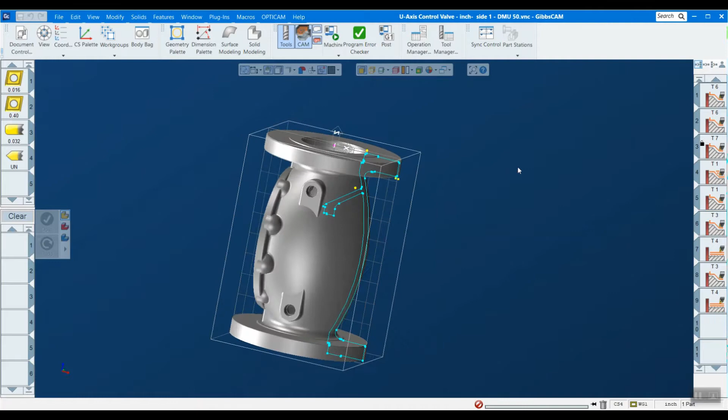a mill. So if you have some kind of roundish part like this, you don't have to do the entire part, obviously, so we're actually just going to be turning this top part here and the ID and adding some threads and stuff in there, but freeing up a lathe or guaranteeing concentricity are the two main benefits that I've seen.

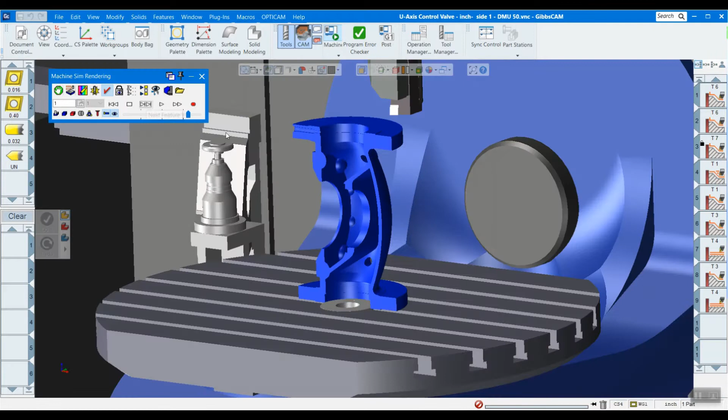So without further ado, I'm going to begin here by jumping into a machine simulation, and I have a nice DMU 50, I believe. I've cut the stock in half so that we can see the ID and OD at the same time. But before I begin, I just kind of want to point out this U-axis tooling here.

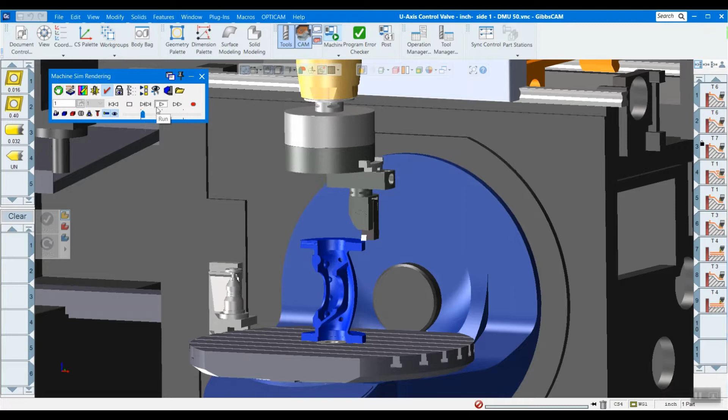So this is all modeled. The cylinder part here was modeled by me per specifications, and then the U-axis head down here was actually got from the manufacturer's website, and then we just put in some standard insert holders into this contraption here, and that's how you set that all up. I'll be going over that in more detail in a minute, but I just want to start off by playing it somewhat slow so you can see how this operates.

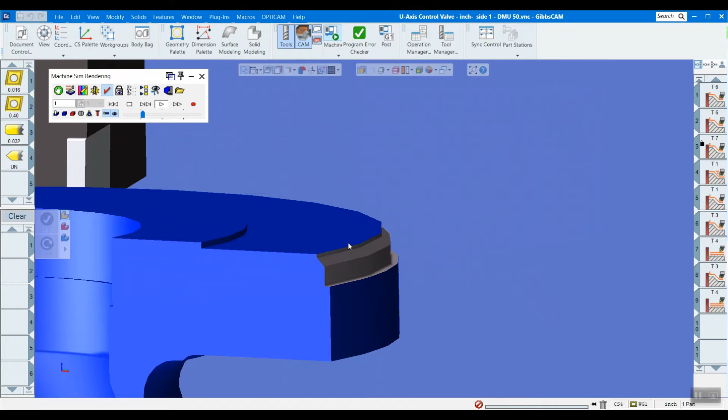Now, it's hard to tell from this toolpath, but the U-axis can actually dynamically decrease the radius that it's milling at. So we actually have a chamfer here, and it slowly increased the U-axis so that we could get a nice little chamfer here. And we'll also be doing the same concept here on the bottom to get an undercut. So I'm going to speed this up.

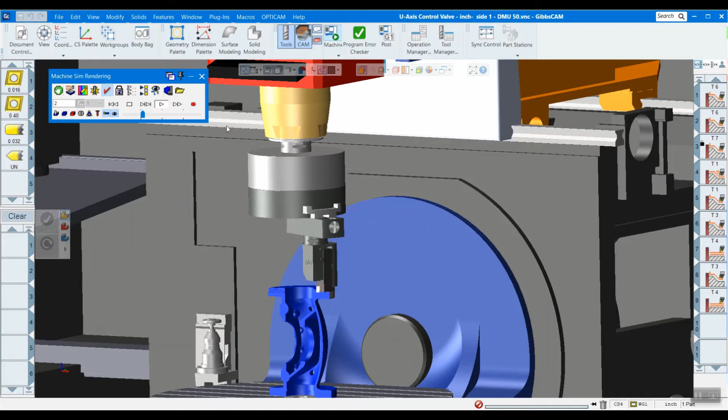Now, one thing to notice is that it looks kind of weird. I feel like you would be getting a lot of wobbling in real life with this, and there's actually not modeled here a counterweight so that you can actually go at really high RPMs, so don't worry if it looks weird here. It's all perfectly normal. So I kind of talked through it, but we did do a little bit of the undercut here.

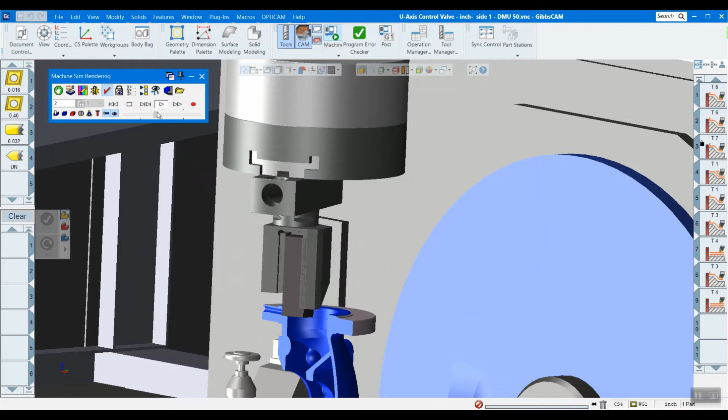All right, and now we're doing kind of the front face here, the top face. Speed this up just a little bit here. Oh, I tried not to miss it, but we did do the backside chamfer here with a groove tool.

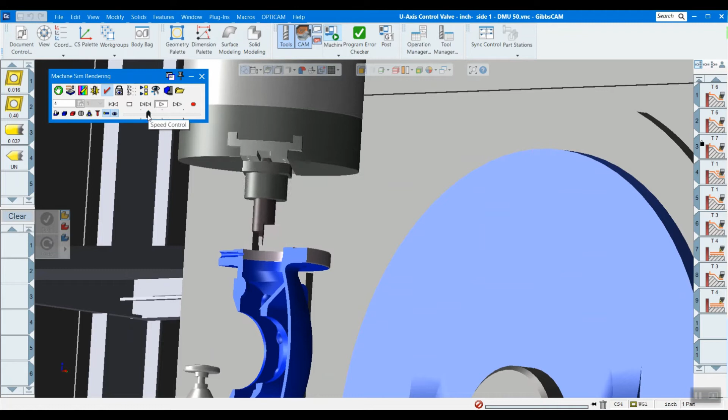Now we're doing some ID work. Now notice that the tooling has changed here, right? So it actually did go and do a tool change, and it gets rid of that big U-axis head and adds another U-axis head in here. So the tool changing takes care of all of that. There is some behind the scenes work we have to do to make sure that it's in the right position when it changes and all that, and I'll go over that in a second.

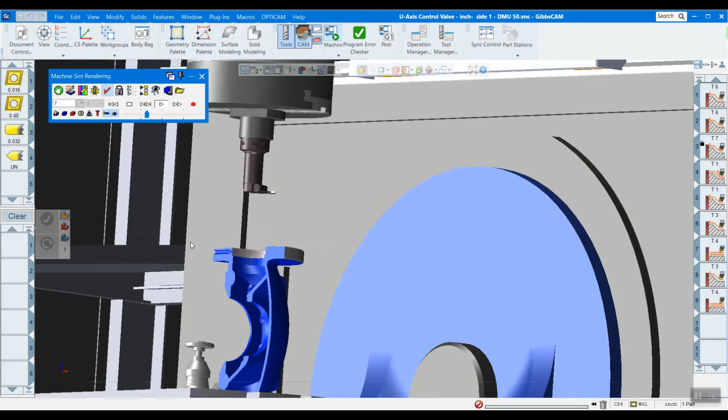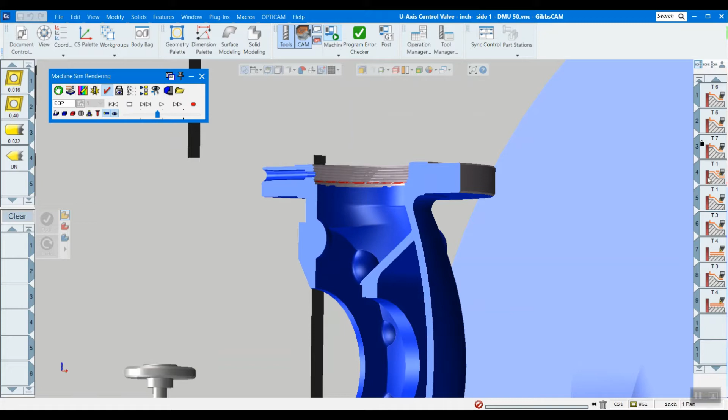You get an ID rough and an ID finish here. All right, and some threads. Cleaning up the threads here. So there's really a lot of functionality to this, a lot of power. You can see that we have threading, contour, and roughing operations, and we're doing all this on a mill. So that's U-axis turning in a nutshell.

Now let's actually go over what I think is the difficult part of U-axis turning, which is the tooling here. Once you actually get the tooling set up and you have your own library and you can save your tool list and all that stuff, it's pretty easy to use U-axis turning. A lot of the initial work comes in actually setting up this tooling. You can see that there's a lot to this mechanism here.

And so we have the piece that goes into your spindle here, the cylindrical piece that was actually modeled by me. And then we have the U-axis head here. And then whatever tool holder I select here will just be placed into here.

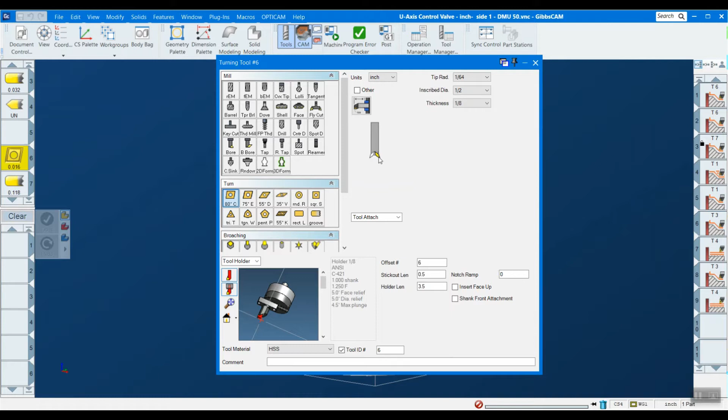And then obviously you're just going to set up your tool like normal, right? So I just have a standard 80-degree insert with my drop-down menu here selected. Nothing there has changed. We do have a way to say OD versus ID with the same tool, and it's actually how you would put the tool holder in there. We're doing OD with this tool, so this is the orientation that we want here. So that's all pretty standard stuff.

Let's actually look at the intermediate tooling here. If you missed it, I click this button here and that opens up the intermediate tooling where we have this big old assembly. This is actually new, this interface is new to GibbsCAM 14, and some of this functionality is what allows us to do U-axis turning now. Before, it wasn't a question of capability of the software, it's just that we didn't have a way to set this up nicely and easily, and now that we do, we're going to be taking full advantage of this.

So we have a tree here, and this is where we find our tooling, our setups here. In the machine definition document, the MDD, if you're familiar, this is what controls all of your machines and that kind of thing. So if I go into document control, just to explain what this is, I have a DMU50 here. That's actually listing the DMU50's MDD. That's what I'm talking about. It's all how your machine is configured.

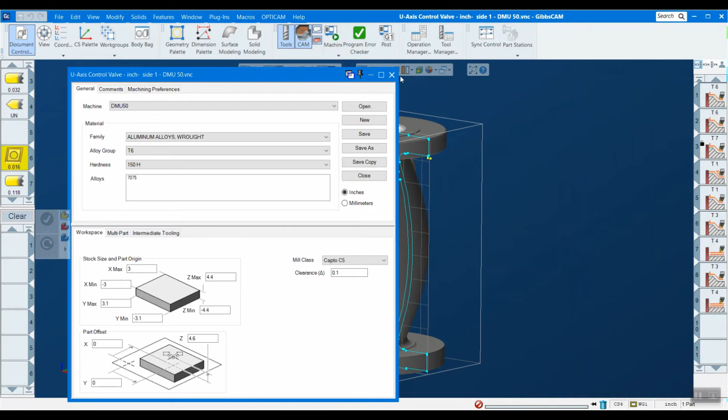Going back into here, on my MDD, which is typically set up by GibbsCAM, not done by users, we have this tree where these axes are referenced. So C-axis in this case is our spindle, and when it spins, it's a rotational axis. You can tell by this kind of loopy arrow here on the axis, right? And here we have all our settings for this axis.

Now, typically I would say you don't really want to mess with this. It's all pretty standard stuff. Interpolated means that as this axis rotates, it'll calculate how the other axes are changing. I can't really think of a reason why you'd want to do parked. You just always kind of want to keep these axes interpolated, especially for intermediate tooling. You can also exclude interpolation in a certain axis. Maybe I have a rotary table or something on this mill. I might want to uncheck my other C-axis so it doesn't get them confused.

But you also have some standing settings here with approach and retracts, right? So you can tell it, hey, where do I want to go when it approaches versus retracts, and we have a drop-down menu here with absolute, so I could have it always retract to 0. And that move is actually done after your retracts and stuff in your operation, so it's adding another layer here. But you have absolute, incremental, short rotation, or no move. Now, since this is a rotary axis, these are degrees, so I'm saying always return to 0 degrees.

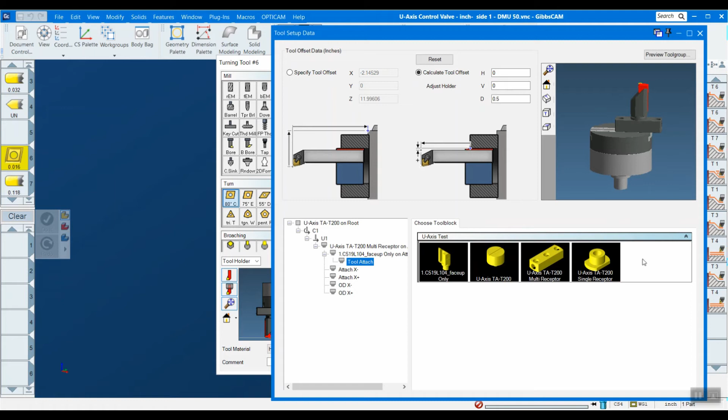So I know that this particular U-axis piece might have compatibility with any number of heads here. So you can add them all in here and then just kind of swap them out there and kind of build your own. You see I accidentally added one I did not want to add, right? But that's that, right?

And these are basically saying that, hey, if I'm doing OD or ID work, hold on here, let me fix that. If I'm doing OD or ID work, which direction do I want to be facing? So that's essentially kind of the same as this, right? I want to be facing outward versus inward. Well, you have to actually define that in here.

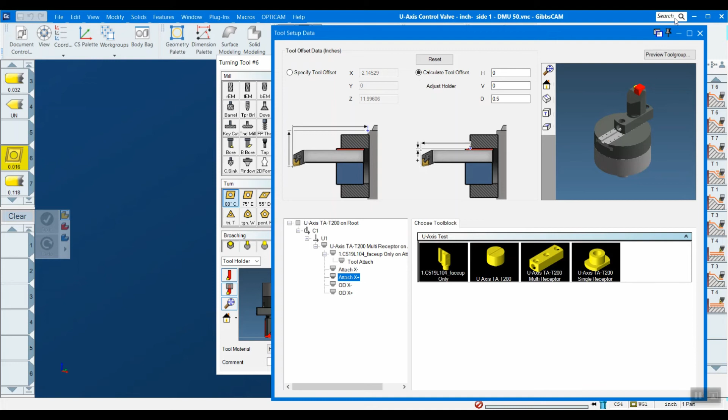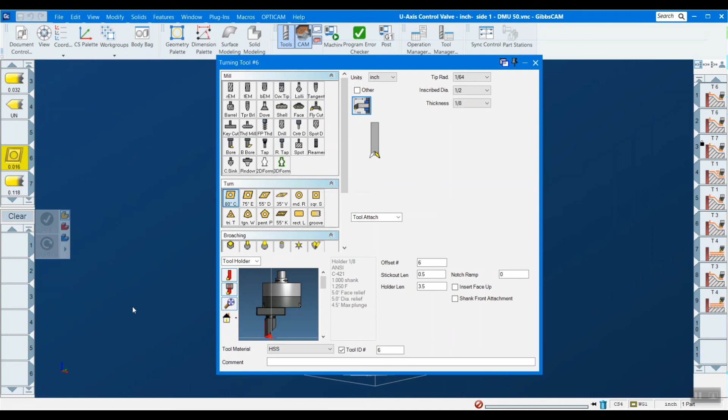So these attachment points, even though they're using the same piece, they're flipped so that we can have both of these positions here. Okay? If I'm going to be using the same thing twice, but once in each position, be sure to define the tool twice. Okay? You can't just go back and switch it and then regen your operation and expect it to not mess other things up, right? But besides all of that, that's pretty much it with the intermediate tooling.

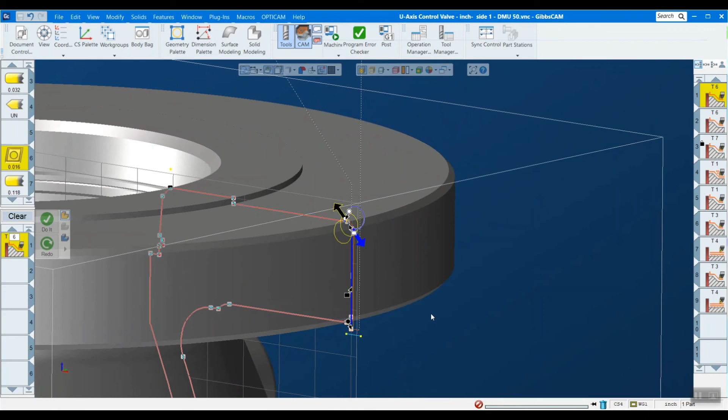Like I said, once you get it all set up and your database is populated and all that kind of stuff, it's pretty easy to actually run here. So I'm going to go through my ops, just kind of show you, but all of these operations are exactly the same as turning. Okay, so I extracted this profile and just select where I want to be machining. Did my markers just like usual. Because I'm selecting geometry, you have to click which one of these circles you're doing. But again, if you're familiar with turning, it's literally the exact same thing.

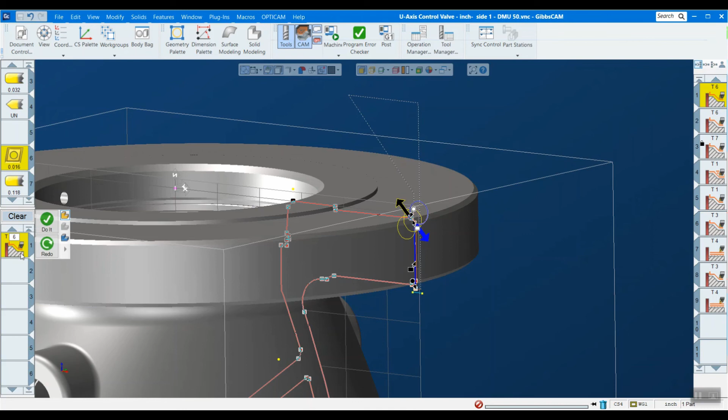And I'll even open up this process here. This is our OD contour, where we kind of make that chamfer and then take off some of the stock here. Okay, so again, just OD. We're actually already in a ZX plane. So typical turning stuff. Have a corner break. I have a lead in. Everything else is pretty much exactly the same. There's really no considerations that you have to do.

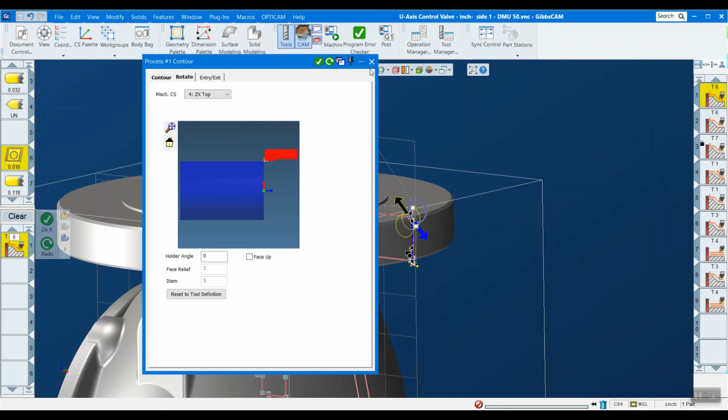Now we want to make sure that you're selecting your correct coordinate system, right? So in this case, we're doing ZX top, which is the plane that I'm in right now. Okay, but other than that, that is the only thing that you really have to do. You should never have to change the holder angle or anything like that, because that's pretty static. I haven't seen any U-axis heads that can dynamically move around at an angle like a B-axis head.

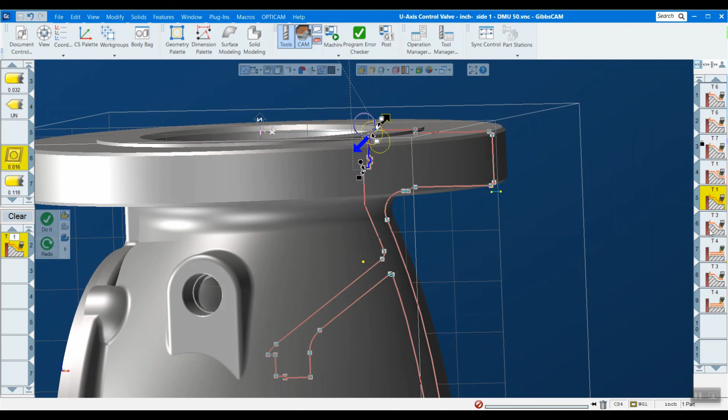But so that's a contour. We just did another contour here on the top. This is our undercut here with our grooving tool. We did a roughing operation here on the ID. And then a contour to clean it up, kind of preparing all for our threading operation.

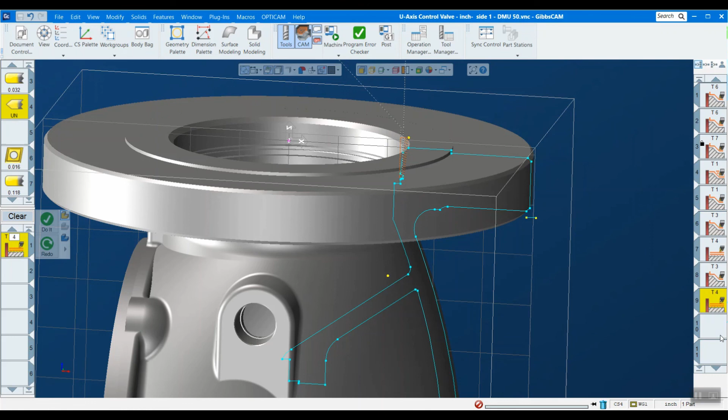And like turning, with some tools, like this UN here, you also don't click the geometry. So again, it's completely identical to turning once you have all that intermediate tooling set up. Okay, so that's my little presentation on U-axis turning, and I hope you learned.